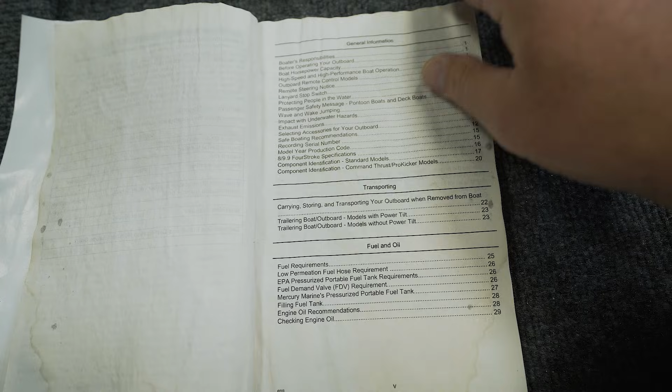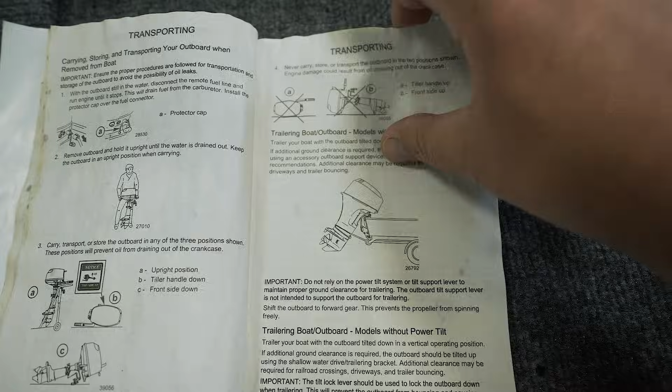Logan was just talking about a tournament trail for John boat owners, 9.9 horsepower only, just because the smaller reservoirs only allow 9.9. I don't know about the electric motor only trails, because you can fish any kind of boat in them, but I'm talking about a straight up John boat, 9.9, that's it. That would be pretty cool, just to have a 9.9 only John boat tournament trail, national, East Coast, West Coast, and Central, kind of like the Opens.

The real reason I'm making this video is because it's time for me to change the oil on the road in my Mercury 9.9. I got this motor last year around this time, sometime I have to document, it's been about a year. So I'm gonna go ahead and change the oil in it, and I'm gonna do this video for everybody out there that wants to know how to change their oil.

I'm doing it a little bit different this time, actually doing it the right way. I've got a manual and it looks rugged, because you know me, I don't do manuals. You see my Garmin install videos, like, yeah.

It's really easy. The cool thing about the 9.9 that I have, mine's a 2020, is I don't have an oil filter. I don't know if the rest have oil filters or not, but mine doesn't. So all you need is a quart of oil, a 5/8 wrench, some paper towels, and some of this right here.

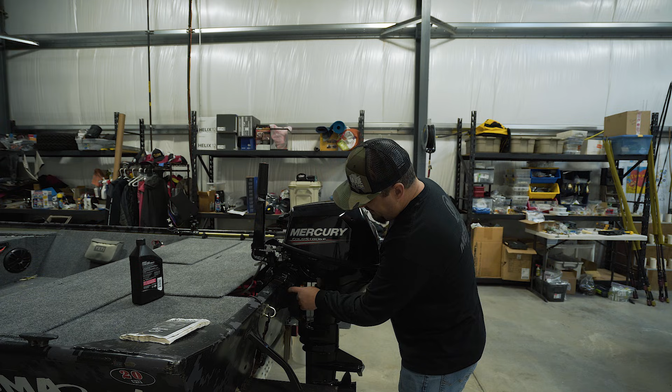Let's get into it. Okay, so the first thing we have to do is put this Mercury in the tilt lock position. It took me a little bit to figure this out, but that's why I'm here, for you. There's a little lever up underneath here that you pull up, okay? This is your tilt lock switch, this is the unlock, this is the tilt lock.

When you have it tilted all the way up, you can take this and lock it. You really don't need it. What I do is pull this lever up like so, and then I just lift it up. We're gonna count the clicks because it goes one more click above and it doesn't lock. Lift your little lever up right here, tilt it. 1, 2, 3, 4, 5, and it's locked.

I've got this loose. There's an adjustment on here that will keep this motor from going back and forth, but I've got it loose because it needs to tilt this way, just like that. Because the bolt, the nut, is on this side of the motor, so you want to tilt it over this way and then it'll stay after you have it locked.

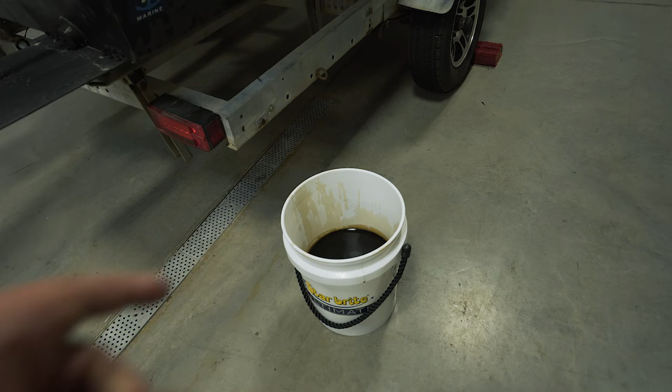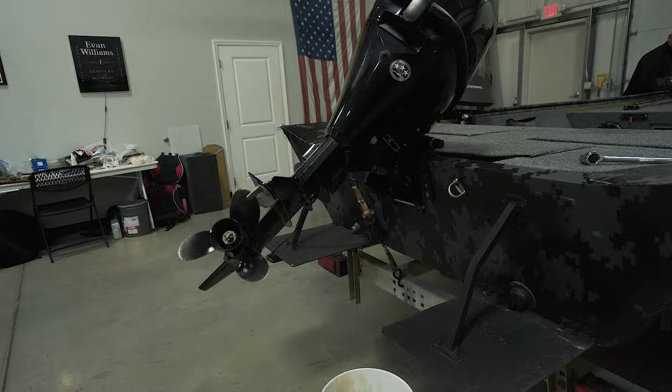One of your biggest assets for this oil change is a bucket. That bucket already has oil in it, so this bucket is made for this oil change. We're gonna take this bucket right here and put it directly up underneath the motor like so. So you can see, if physics work out for me like they always do, where that screw is right there, that bolt, once I take it out, it's gonna drip directly into that bucket, not leaving one drip of mess.

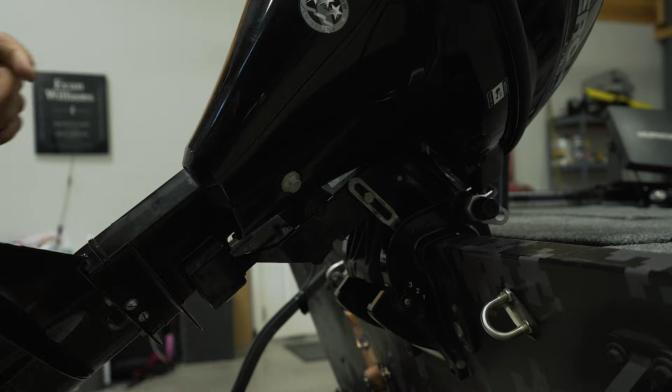Now I'm going to go ahead and break this loose. They are a little tight, so I've already broke this loose, I'm not gonna lie, just so I didn't look like an idiot jumping up and down on my motor. Always remember, righty-tighty, lefty-loosey, all right? Now we're just gonna let this drain and see where it goes. Make sure you move your bucket if there's any spillage, and if so, my trim tabs will catch it.

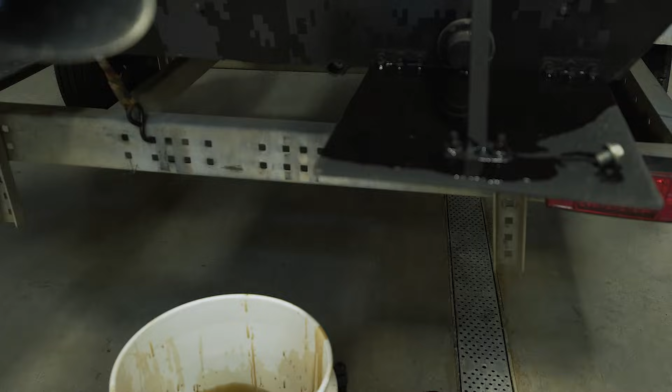This was going to be a little bit of a mess, but that stuff really shoots out of the side of that motor. Luckily my trim tabs were there to catch most of it, so I got a little bit of a mess on there. But cat litter would take care of that, no problem.

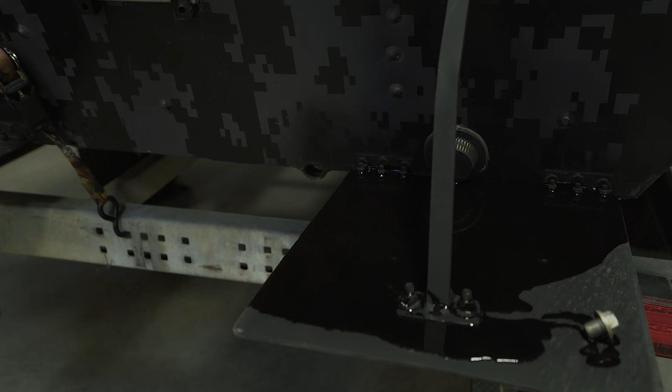So after it's drained completely on its side, you want to lift it up and get it vertical just to make sure it's all out. So you just push up on it like so, come on down, and let her drain. There's a little bit more coming out.

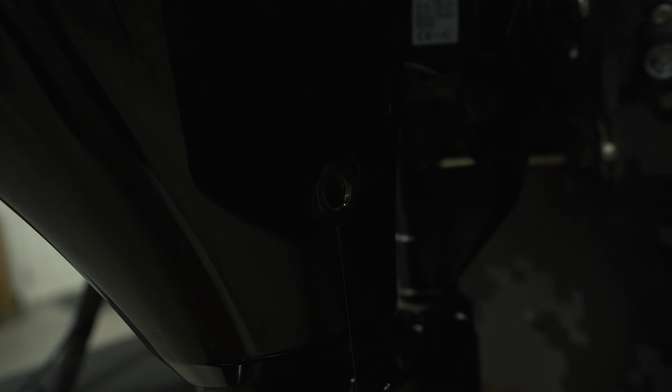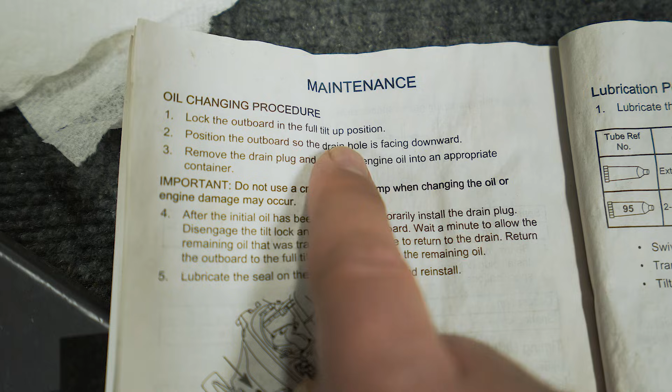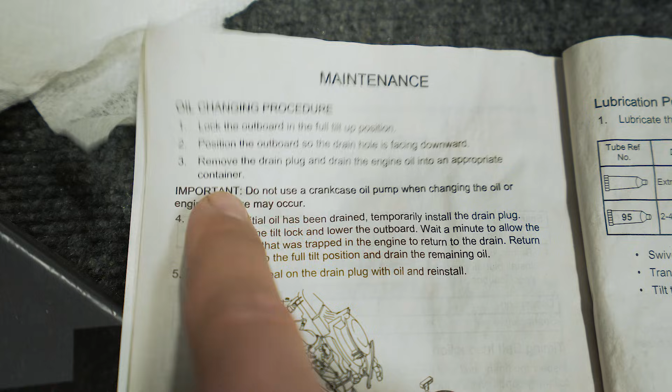Alright, going by the manual, everything in order has been peachy. So I locked the outboard in full tilt up position. That's done. Position the outboard so the drain hole is facing downward. Done. Remove the drain plug and drain the engine oil into an appropriate container, a bucket. Yes, done. Do not use a crankcase oil pump when changing the oil, or engine damage may occur. We didn't do that, okay? So don't worry about it.

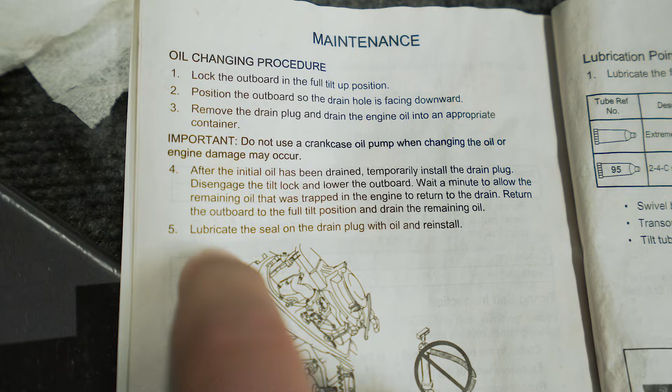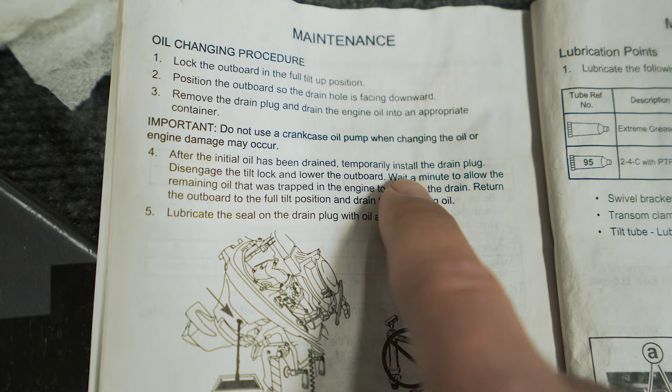After the initial oil has been drained, temporarily install the drain plug, disengage the tilt lock, and lower the outboard. Wait a minute to allow the remaining oil that was trapped in the engine to return to the drain. Return the outboard to full tilt position and drain the remaining oil.

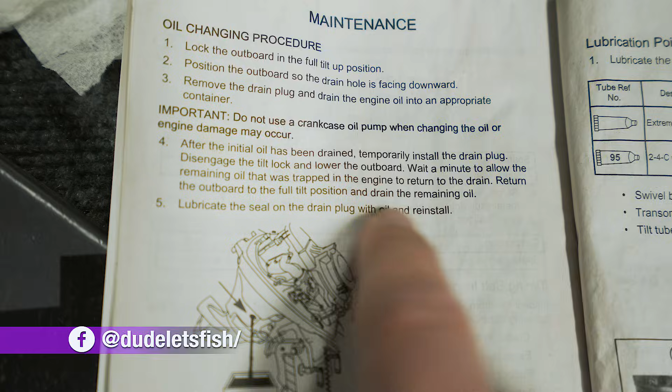So let's go ahead, and forgot to say that paper towels was a necessity during this, just so you don't make a big old fat mess, because oil is messy. We'll go ahead and tilt this up real quick one more time.

One more click. Nope, right there. Push your bucket over. Nothing. Looks great. All right, disengage it, throw it back down. Let's see what the next step is.

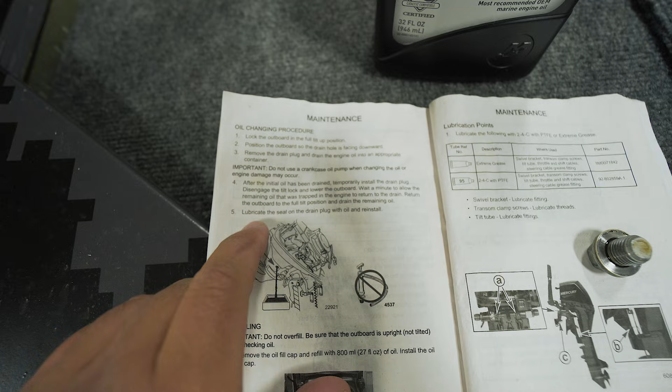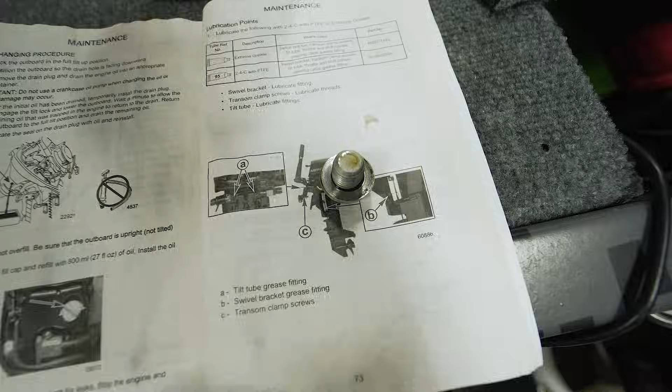Lubricate the seal on the drain plug with oil and reinstall. So the seal is what goes around the bolt right here. So you just want to take a little dab of oil, put it on your finger, and rub right around that little bolt. So I got my Mercury 4-stroke 10W30 right here.

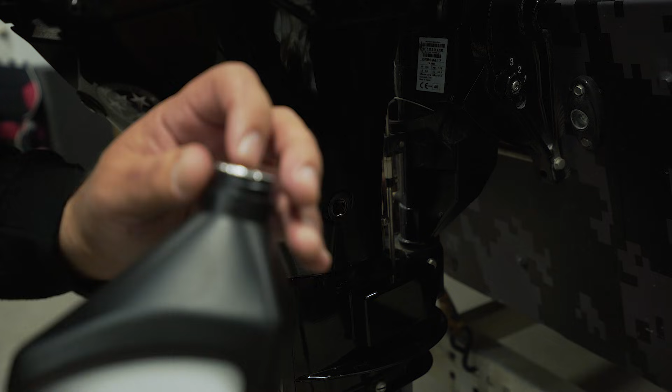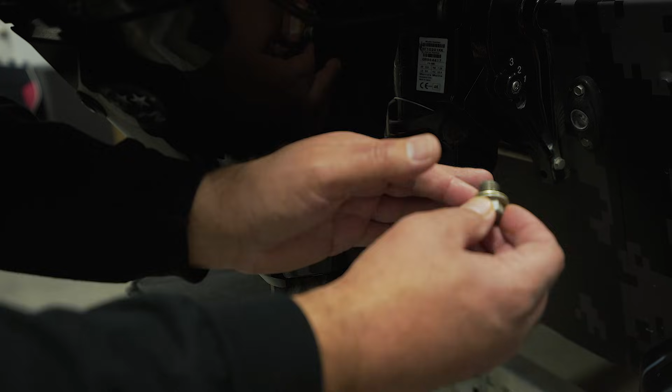I like to use Mercury oil because it's a Mercury motor. So what I'm gonna do is I'm gonna take the top off, like so, reach down there and get me a little bit of oil on my finger, and then I'm going to spread it around the ring right here, or the seal. I'm going to go ahead and put this back in.

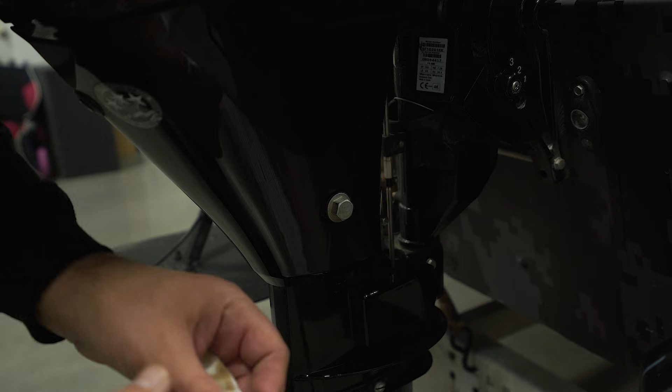Tighten her up just a little, just like that. Get your paper towel, wipe off all the little oil drippings. Keep it clean, keep it clean. No, it ain't a 25 horse, it's a 9.9, but I keep it clean though. Wipe all that oil off, because if not, dust and dirt and everything else is going to stick to it.

So the next thing I'm going to do is, what it says in the manual is important: do not overfill, be sure that the outboard is upright, not tilted, when checking the oil. It's common sense, people. It's all it is.

I got plenty of it. In layman's terms is, unscrew the oil cap, put the oil in, screw it back on. They just make it a little complicated.

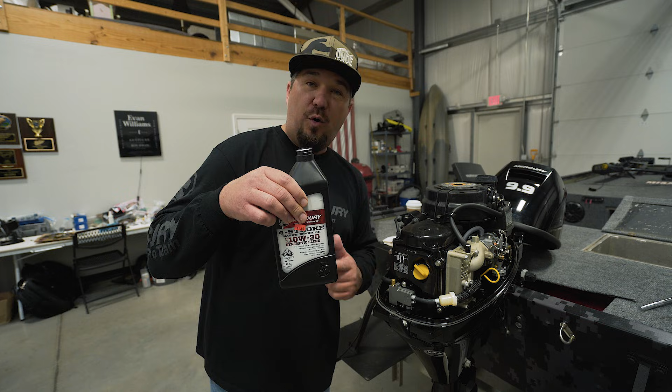Take the cowling off. Hey! What? How many ounces is in a quart? 32. And how many did you need? 27. All right, yeah, so you're not going to use the whole quart. Thanks, Bob. You're not going to use the whole quart. You're only going to use 27 ounces. That's why they say don't overfill. You know, you get a little carried away, pour this whole thing in there, it's going to be 32 ounces. I don't know what happens.

So right here's your oil cap. Go ahead, unscrew this, is what they're saying.

Just like that. All right.

Probably don't need a funnel with this if you got a man with the slow hand like me and Conway Twitty. The oil I'm using is Mercury oil, 4-stroke marine engine oil, 10W30. This is a synthetic blend.

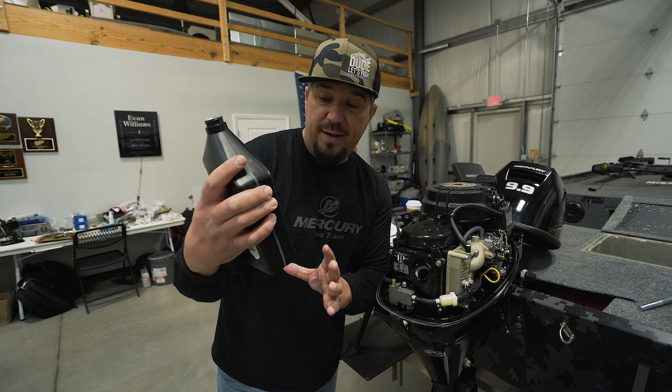So this is 32 ounces. So how many ounces do we need to have left if it only needs 27? 28, 29, 30, 31, 32. That's 4, right? So you're almost going to pour the whole thing in there, but don't.

And you do have your plug in, right? Your little bolt. Just checking. Do I? Yes, it's in there.

So let's go ahead and pour this in. Make sure your engine is tilted upright like they said. They have to do it for security reasons or whatever.

Oil's going in nice and good. Good flow, I'm getting a good flow. So I'm going to go ahead and check, see how much I put in it. I've probably put a little bit over half in it.

Don't want to overfill it. 27 ounces, 32 ounces in a quart. 27, 28, 29, 30, 31, 32. So that's 4 or 5 ounces. I'm not good with math.